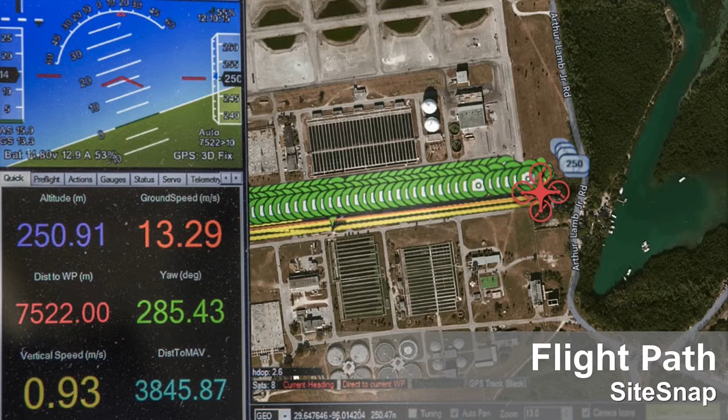But what we did is we went in and set up a flight plan. With setting up a flight plan, you're not just out there with a pilot just going out and flying a drone. You really want to plan out ahead. You've got to deal with weather, you've got to deal with all the different types of structures that are there. You have to deal with certain areas you're not supposed to fly into, because Miami-Dade's air traffic kind of flows over this area. So there's a lot of things you got to take into consideration, but then you go out, you plan it, and when you work with your photographer and your pilot, you want to make sure that you're capturing all the data.

So when we're pulling this in and getting the data, we want to make sure that the quality assurance is there and the integrity of the model is there. Because we live in Denver, Colorado, and our flight crew lives in Texas, if we all of a sudden don't have the data, we run into some real issues.

Now here are the issues with the reconstruction processing that we put this through. When we ran it through the first time in one of the compositing type of photogrammetry softwares that we use, we didn't have all the data we needed.

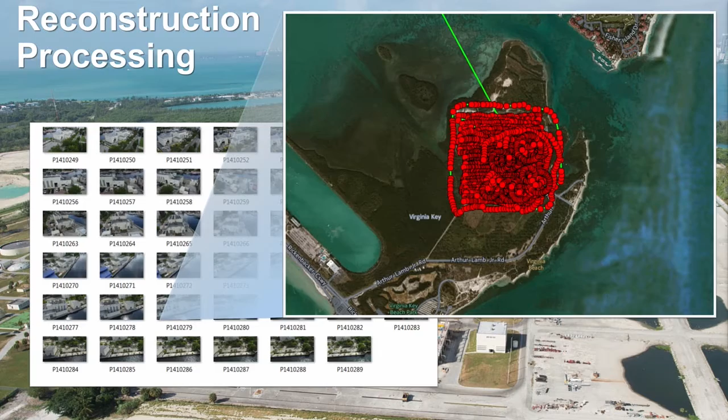So we actually had to go back out and shoot it. That's why these layers of dots are all cameras, or all photographs. But then there's layers upon layers, because we realized that on a treatment plant, yes, we have boxes and regular structured buildings, but we have spherics, cylinders, and underground basin-type things that we needed to capture, which we didn't get, and we didn't communicate that with our actual drone capturing company.

Within the reconstruction process, it can be very labor intensive, especially if your data isn't clean. We've learned this the hard way, and it's been a long process of re-tagging, readjusting images, and then going in and actually building and adjusting the meshes. Because passing things off to someone like Jed, who's a structural engineer, they get a little testy when things aren't as accurate as they should be.

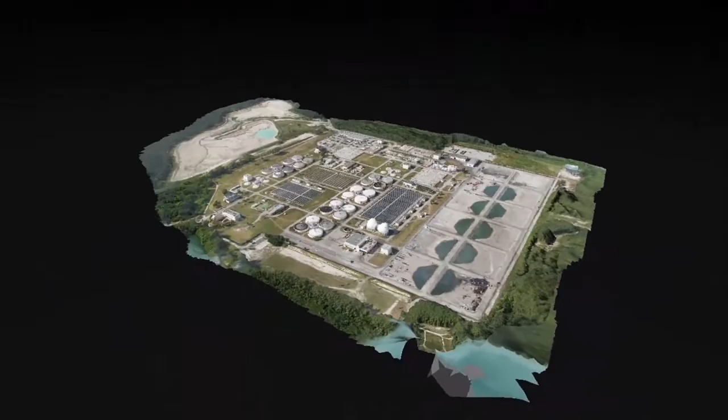So now you can see we went in and processed all the images. This is a nice representation, a 3D existing representation of the Miami treatment plant. I know it's a treatment plant, but we all love water, so it's good. Within this, now I have this existing thing that not only can I communicate with the client, I can use this for not only marketing, but social outreach, but now I actually have an editable mesh.

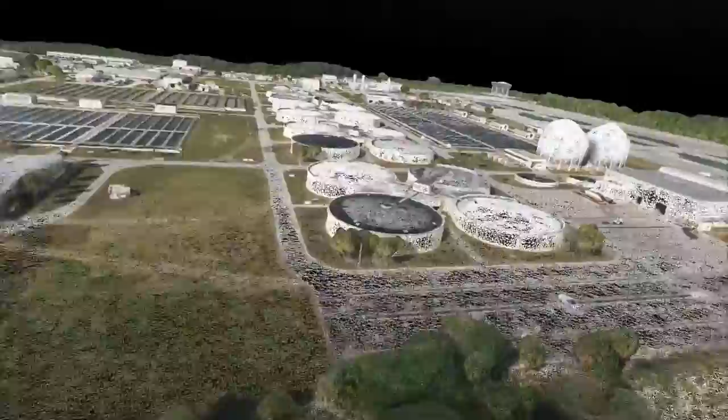When I take this editable mesh, I can pass this off to a civil 3D engineer, and I can also pass it off to a structural engineer like Jed.

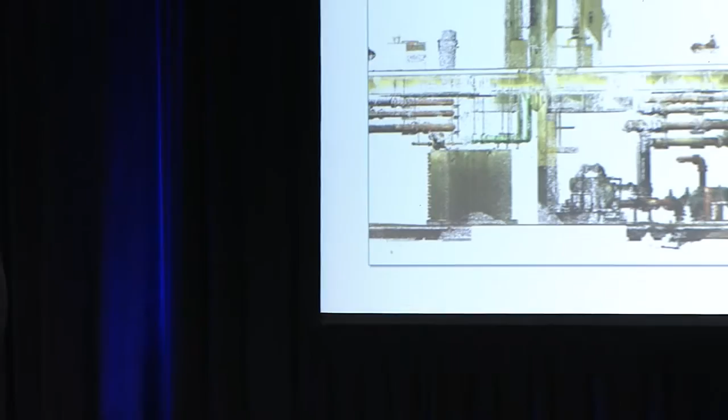So this is where the fun for me begins. This is where the design process really starts.

With the photogrammetry, we don't quite get the accuracy that we're looking for when we're going into doing our full BIM design model. So this is where we start to bring in some of the laser technologies that you've seen throughout the conference. The nice thing with this laser technology nowadays is that it's really advanced, and we get accurate geo-referenced laser scans with true RGB color.

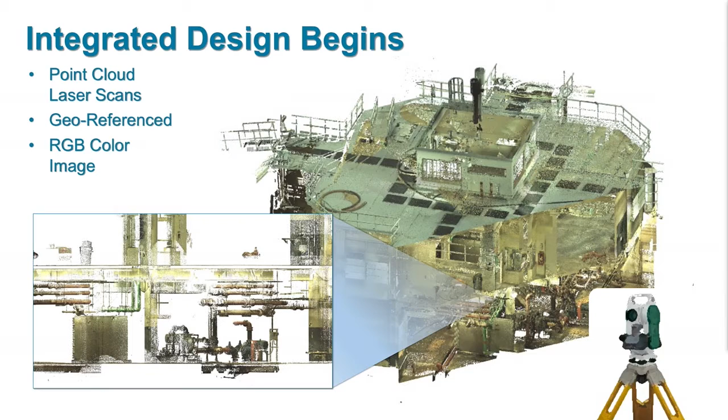Now this provides us the opportunity to really identify the individual pieces and parts within the structure so that we can properly model it as an existing condition.

So now we've got this point cloud data. We can bring it into our BIM design software, and this is where we can really start designing the existing conditions of the facility. As you can see here, we've got individual pieces and parts, walls, slabs, windows, piping systems. All of this has a unique identifier so that we can track it throughout the design process.

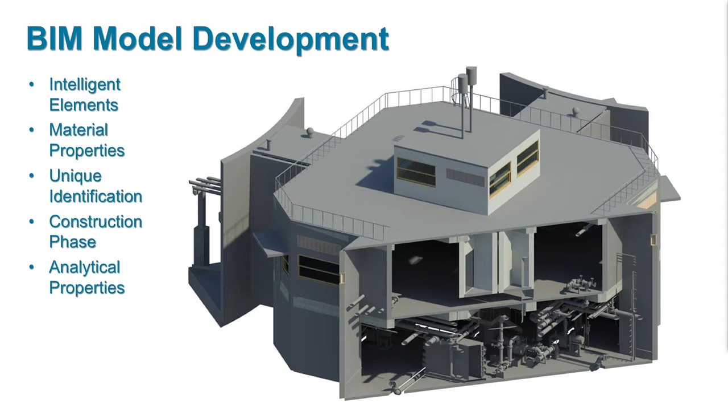The other nice thing is this is where we start to bring in the information to the project. This is where we can assign concrete properties, we can assign analytical information to the concrete, to the columns, to the different components. We also have the capabilities with the point cloud data to automatically scan that point cloud data for piping systems, which really speeds up the process in creating the existing model.

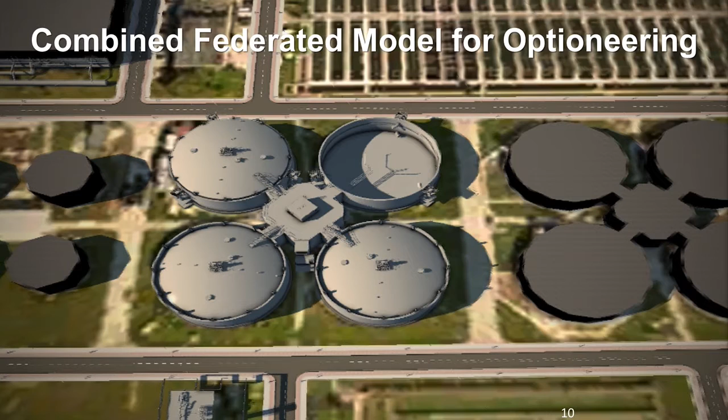Now that we have this existing model, we're able to combine that with Rael's SiteSnap technology to have a true existing condition. This is where we can start doing our optioneering. With this layout, we can bring in new structures, we can modify the existing structures, we can really give our clients a good idea of what we're going to do with this project.

Now, if we want to go a step further, we want to get into the inner workings of the structures, we can move farther and bring in virtual reality. We've seen a little bit of this earlier in the presentation, but here is where we can do the full immersion within the model itself.

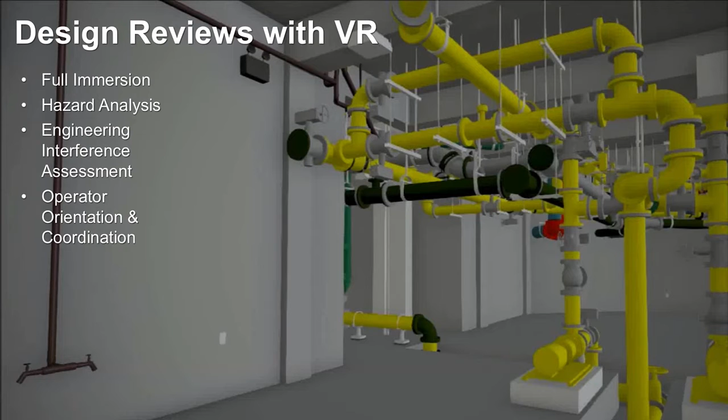In this model, we're able to walk through the structure with the other design engineers. We can check for clash detections with each system, make sure that the piping's not running through my column, run the cable trays, and make sure that the design functions as necessary. We can do hazard assessments, and we can even bring in operators and the owners into the design to have them look through the design of the facility to make sure it's meeting their needs.

Once we have the complete 100% design model, we can do our last minute checks. We can check for clashes between the other disciplines like we previously did, but really verify that the model is complete. We can also get a better cost estimate because now we know every piece and part of the structure we're building. It helps us moving forward and gives the owner confidence on what we're providing them.

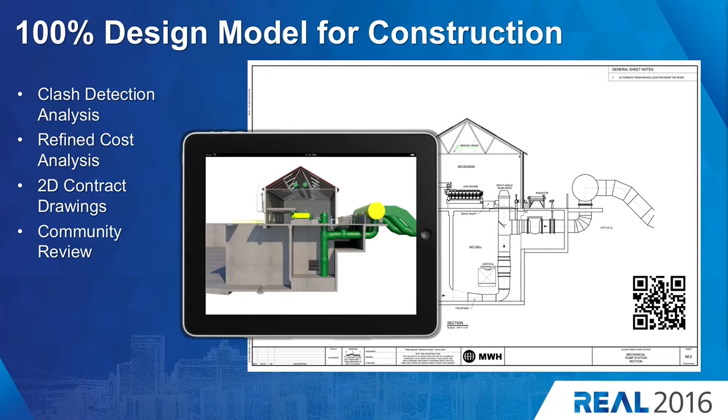Part of the design process is that we have to submit construction documents to the state. That's 2D drawings, nothing fancy, but the nice thing is we're able to bring in a little augmented reality to the picture. So you have some technical people, some non-technical people. The technical people can look at an augmented reality view of the structure using QR codes placed on the drawings. The non-technical people can look at the 2D drawing just as they typically would. It's a nice balance of technologies that's still very relevant for us.

Now the other nice thing is with this 100% design model, we can combine it with the SiteSnap technology that Rael developed earlier. We can take this to the community, so now they can see what it actually looks like in the real world. Nobody likes an eyesore in their backyard, everybody's concerned with that. So this really gives the community a nice comfort level on what they're getting.

So usually this is where the model dies. But what we really want to do is keep this model alive and take it into the construction industry. What we can do is bring the model into the hands of the contractor. Here's where they can... let's see if it works. No, okay, forget that one.

Here's where they can go into 4D, 5D production. With this, they're able to take each part, each element that we've already designed, and assign it to a specific time scale. So they're able to track the progress of the construction. They can also look at the cost value of each individual element within that cycle. It gives them a great way to track the progress of the project.

Now that we have the full construction model, we try to engage the contractor to make sure that model is kept up to date as much as possible, or we ask the design engineer to keep that project up as well. The reason for that is when we roll into O&M, or when the project is complete, we can provide that model to the owner.

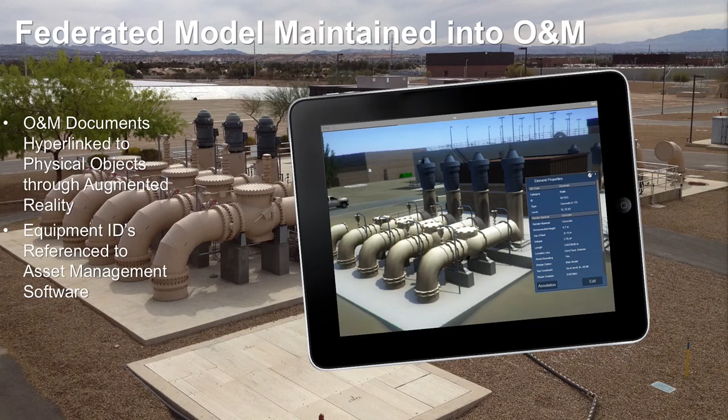The nice thing here is you can see on the left the actual built facility, and on the right the digital representation of that facility. With augmented reality, we're able to give the owner the ability to look at any piece and part of their facility with the associated data. We can have hyperlinked cut sheets, operation and maintenance data—anything you want to know about that equipment is there for their use.

So now that we've gone through the complete design cycle, we start the process over again. The more iterations we go through, the better we get and the more efficient we become.